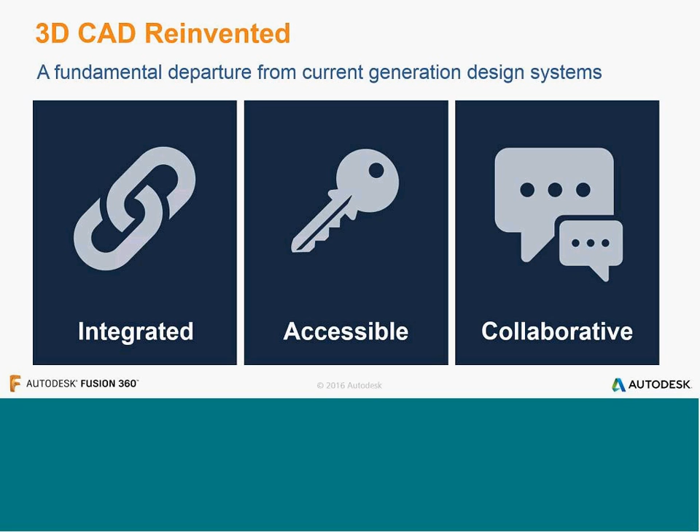This allows you to collaborate with all other teams and people involved in the project you're working on. So about integration, the platform works with your design from concept through engineering to production. So your tools include 3D modeling, like primitive modeling, solid modeling, and modeling functions for parametric modeling.

You can work with scan data and so on. You can design from a motion perspective, checking if there is some collision, if motion is possible or not. You can animate it, render it, and work with it. There are also tools for CNC code generation, 3D printing, 2D drawing generation, and working with prototypes.

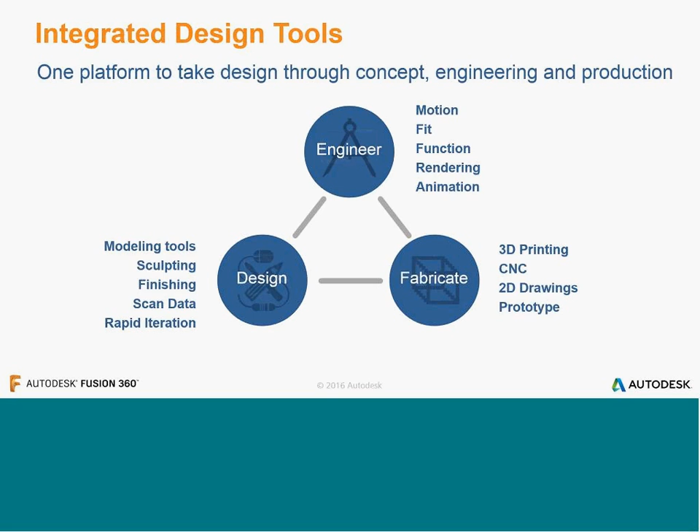This platform is accessible at any time. You can use your standard PC with Windows operating system, or a Mac computer with OS X, but it also works with your tablet or smartphone.

You can also do some reviewing and marking on mobile devices. And it's easy to use - we'll see it later - so you immediately start to use it without any special training or special learning.

And as it's in the cloud, it can include communication ways like emails, phone, tasks, meetings, and so on. You can use data you already created, like drawings, mechanisms or schemes of mechanisms, renderings, simulations, and so on. Then you can gather with your colleagues in your team, but also outside your team or company, with your supplier chain or with your customers.

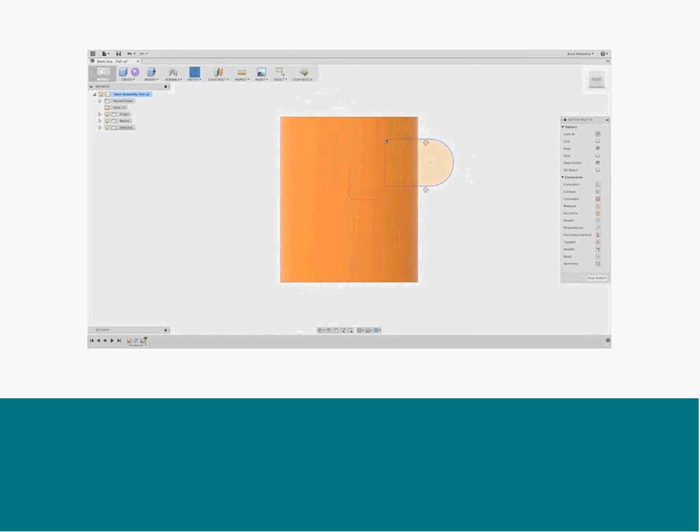Several examples. The platform Fusion 360 works - this is the Fusion 360 modeling environment, working on the modeling of the component.

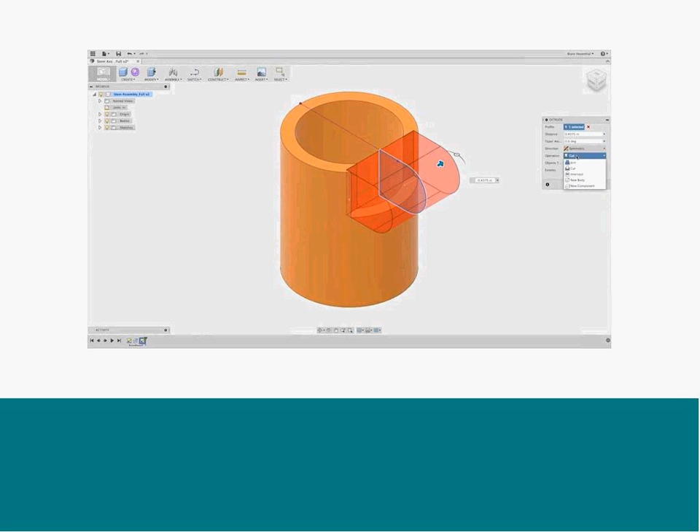I have the standard functions like the profile, with the internal cylinder, which can also include other manufacturing components like threads or pin holes.

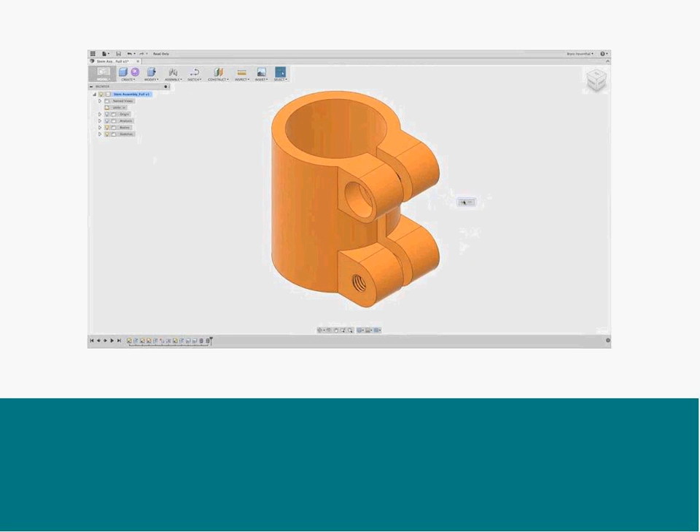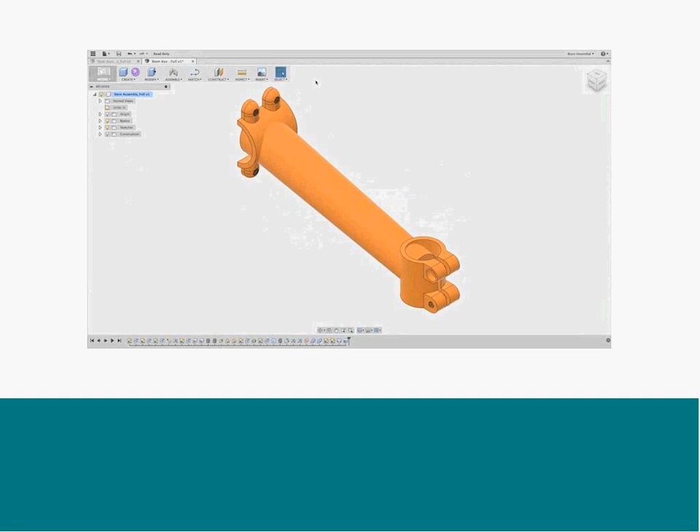Right now, sectioning of the volume just to see how the component looks inside. Continuing modeling other features of this shaft, of these two connecting points. Definition of the thickness.

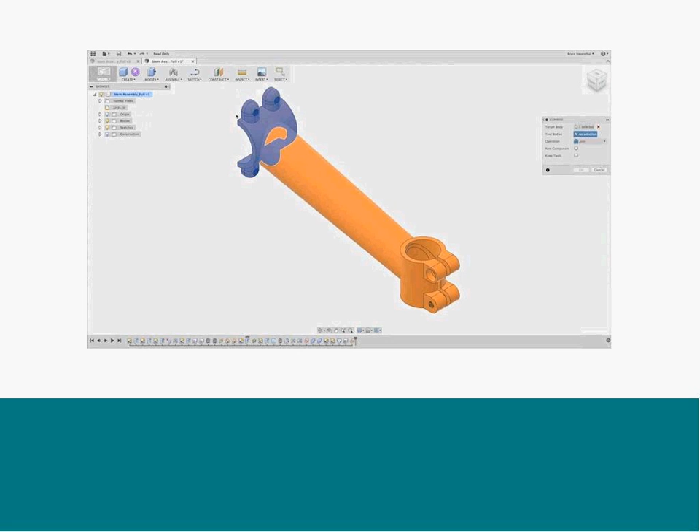So this prepares it for usage in other assemblies, components, and so on.

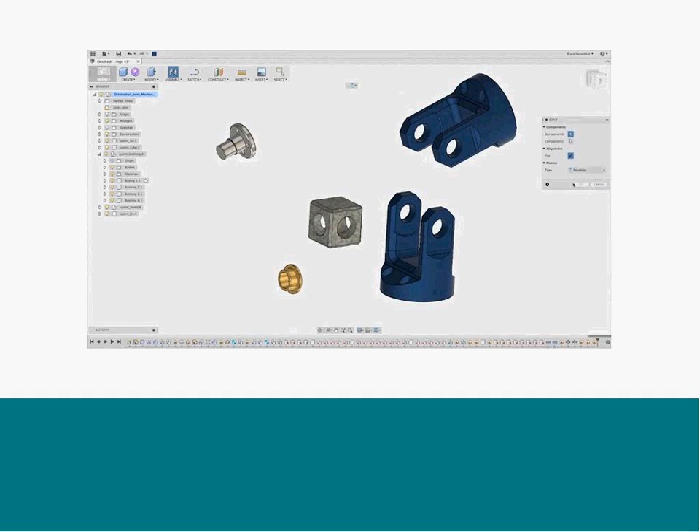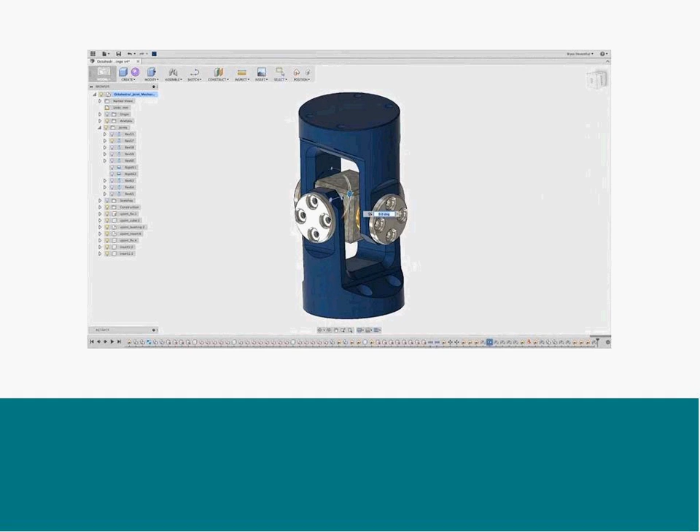Another example: I prepare components and assemble them together with joints, several kinematic joints. I define the joint between components, naming it, and because it's already predefined, the previous component is connected to the system. All joints - so this joint is defined.

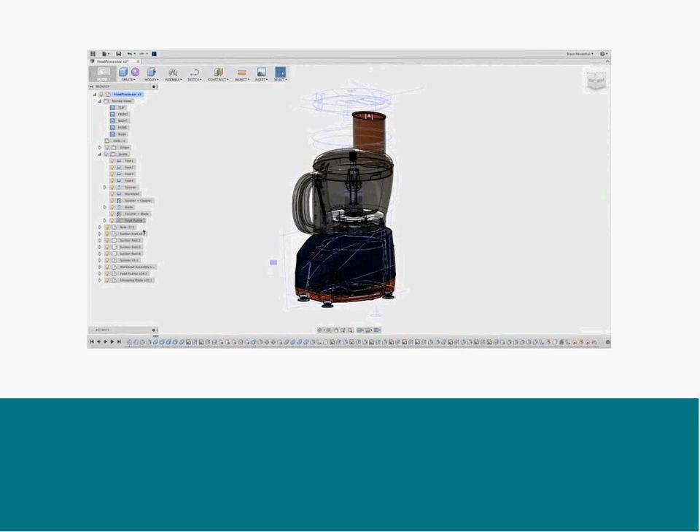The movement and work with analyzing and optimizing each component. An example could be a mixer, where I can define how this pusher component is sitting inside the material, how it cuts with the knife inside.

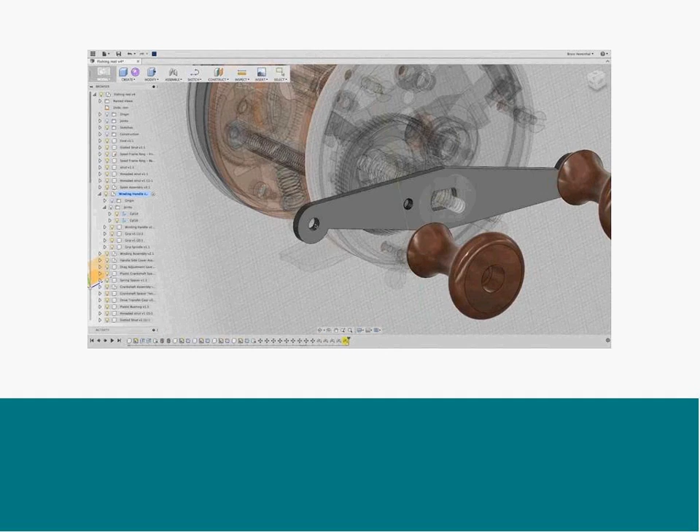With joints, we can also show some gearing, where I find the rotation, the joints, and see the movement and define the movement of the mechanism.

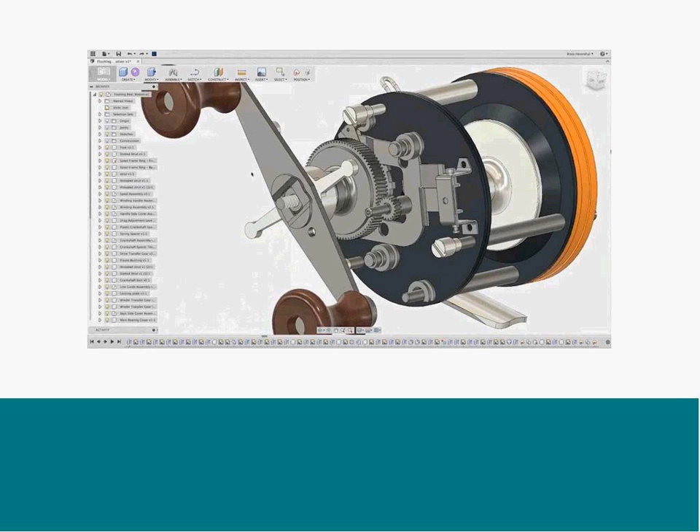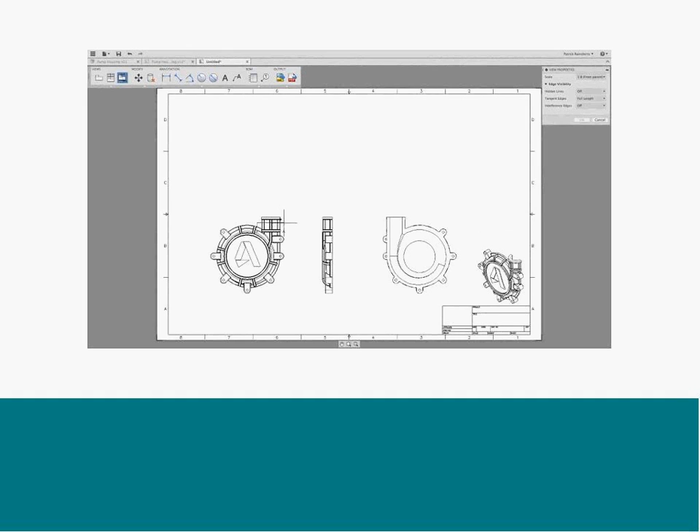Let's see another example related to drawings. So I have added the drawings - creation of the views, isometric views, setting the scale, putting in all partial sections, as you see here.

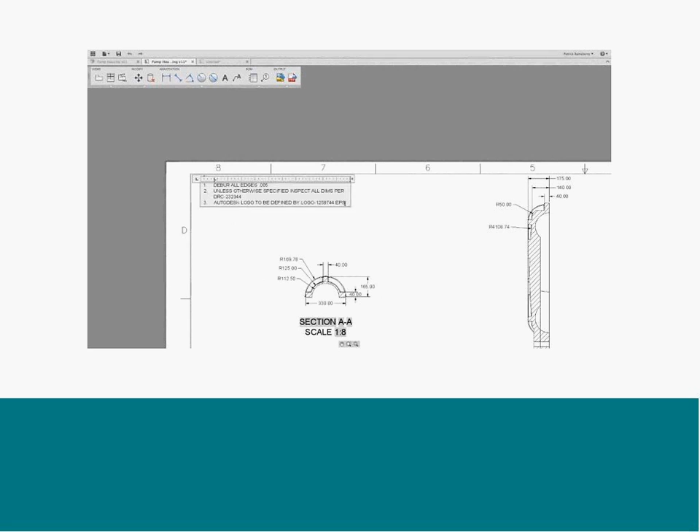I have similar tools to what you already know from AutoCAD. You can use text notes and other tools for creation of the drawings.

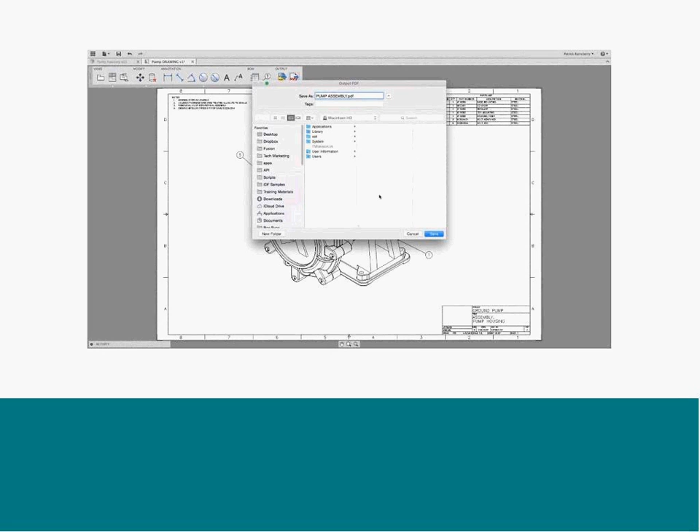So with bill of materials, you can build a parts list, with all components, and you set up the bill of materials.

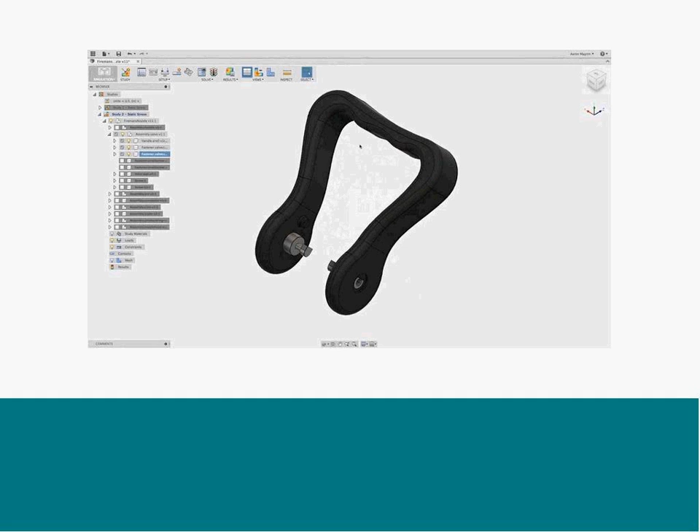I will talk about simulation. This nozzle analysis - let's look at this. So there's the definition, and the loading of forces acting on the handle.

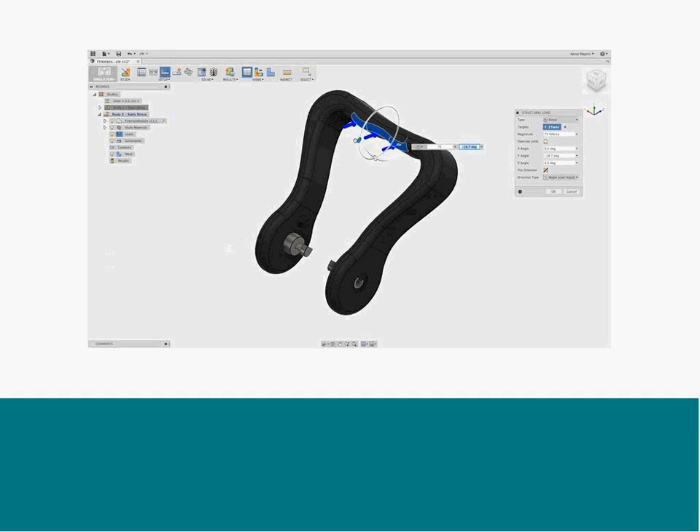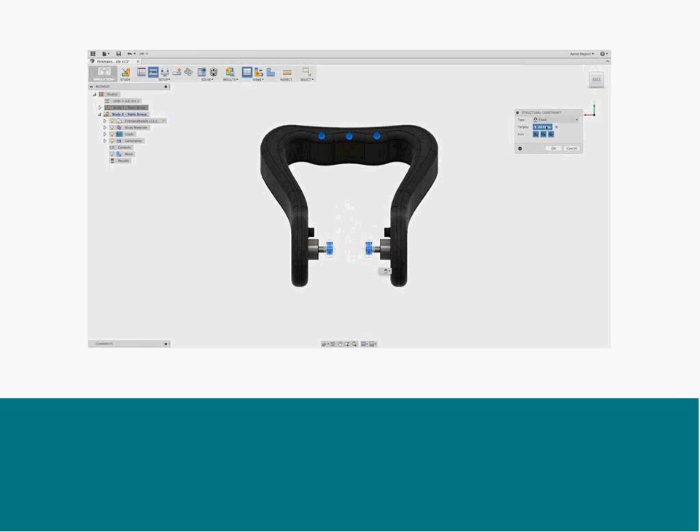Friction on surfaces, and finding the constraints that are not able to move. This is using the finite element method.

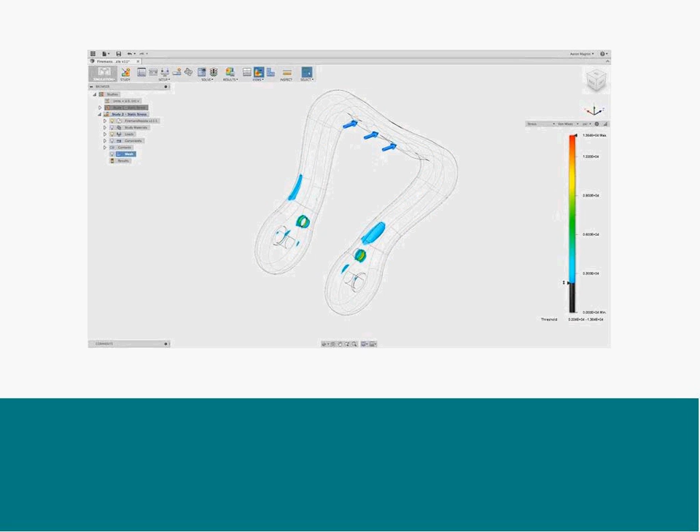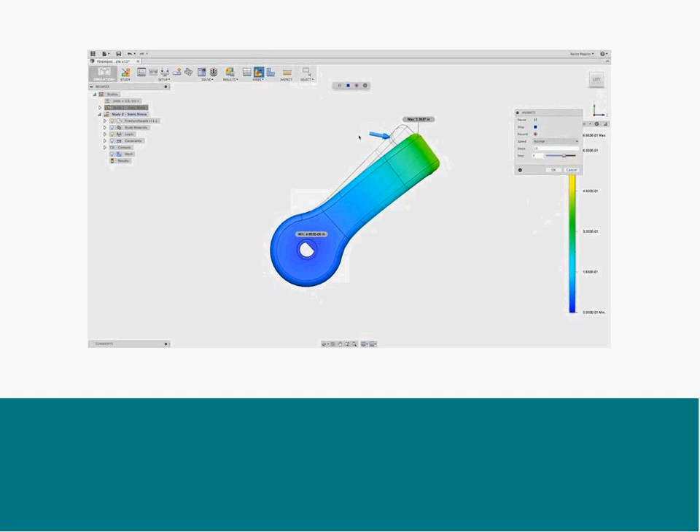I needed to create the mesh, and I have the result. I see the stress risk, and I can see the value I could find, and the displacement of this handle. This helps to make the decision if my design is correct or if I should make some changes.

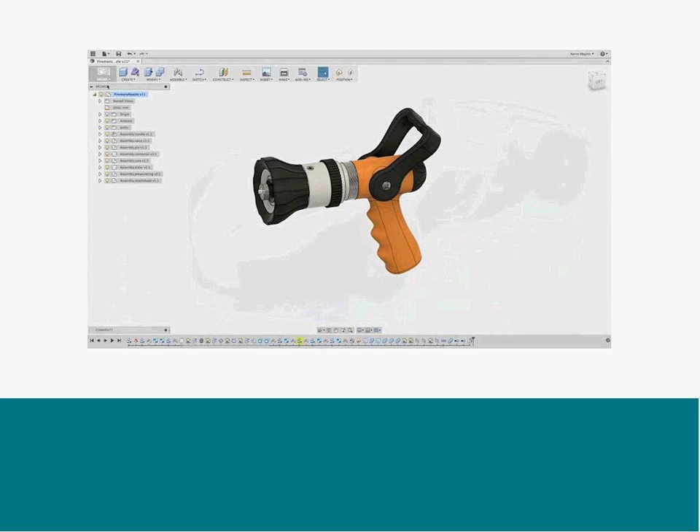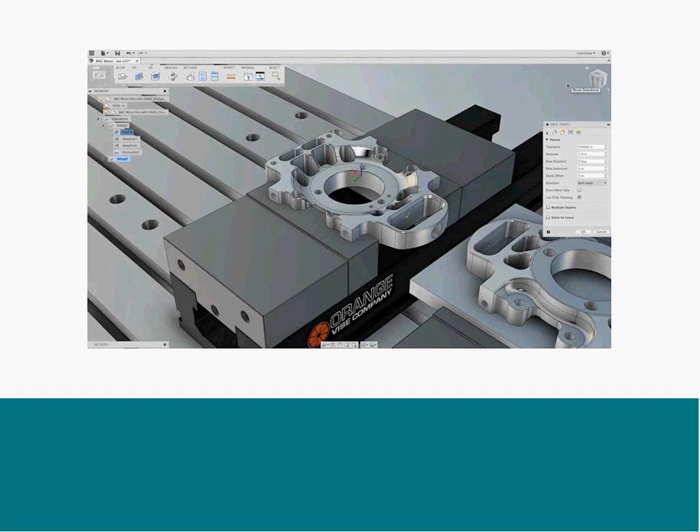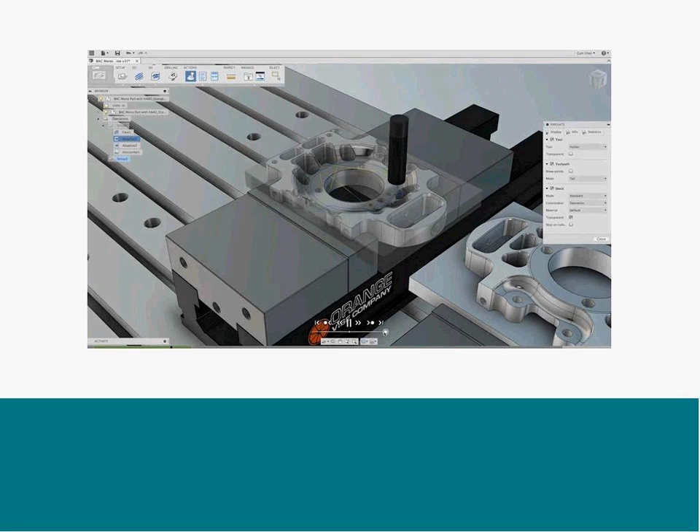I define what I want to machine, by which tools, and how I want to create it. I call the simulation and see the traces, trajectories, time, tools, and so on.